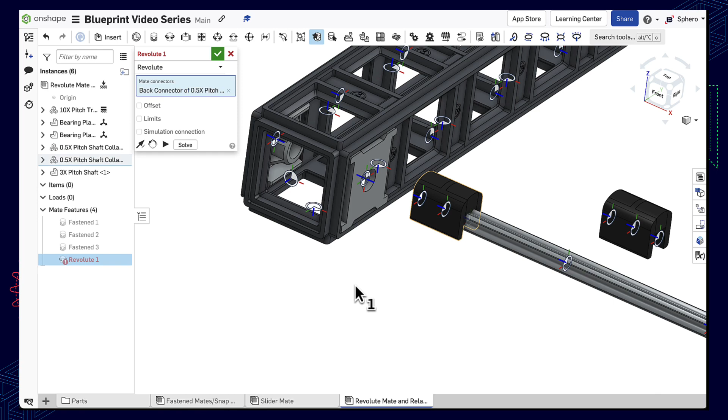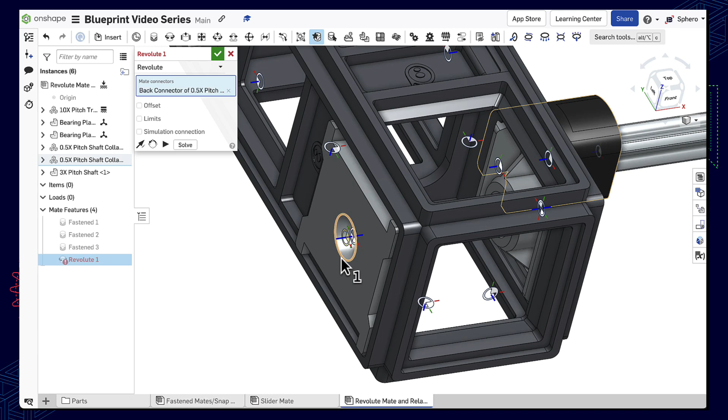Then select the mate connector, not the one that's inside of the bearing plate, but the one that's on the surface of the bearing plate. So you can move around until your cursor highlights the one that's on the outside edge of that hole through the bearing plate. When you apply this, notice that it moved the shaft collar, but not the shaft.

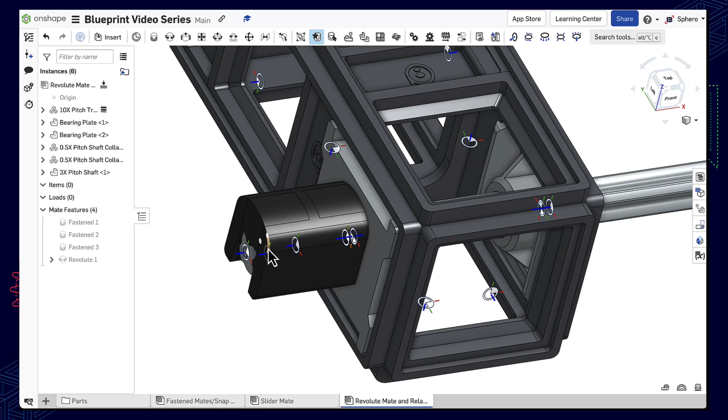Click the Solve button so that Onshape solves for all of the parts and mates that are inside of your assembly document. If you're happy with how the mate is constrained, click on the check mark. Now, we'll be able to rotate that shaft and shaft collar inside of the bearing plates. Notice that you cannot move the bearing plates or the shaft side to side from the bearing plates.

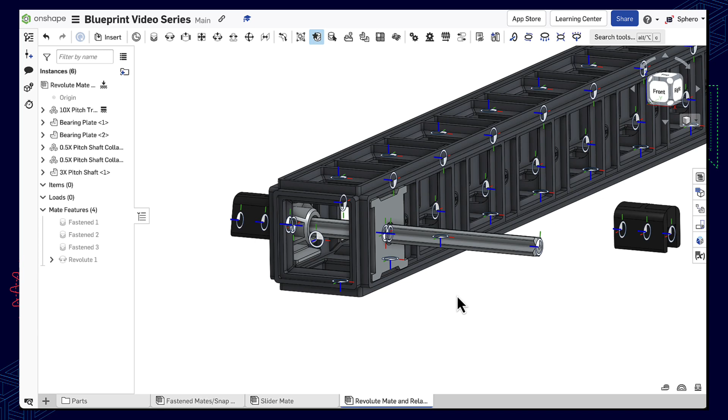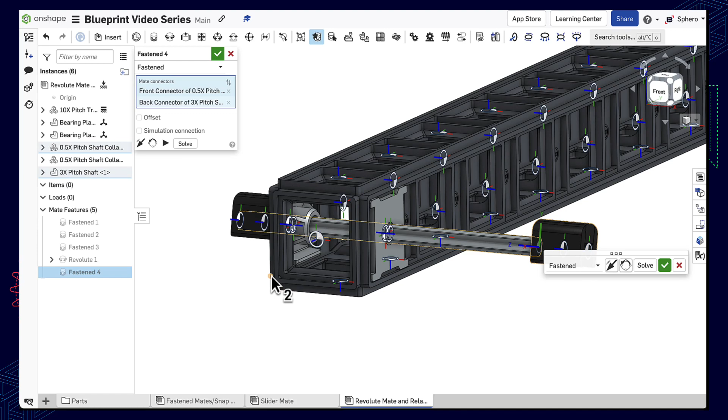Now, we need to constrain the other half-pitch shaft collar to the other side of the shaft. For this, we're going to use a fasten mate and select the mate connector on the shaft collar and the mate connector on the shaft. We don't want the shaft collar to be out here in space, so we're going to apply an offset by clicking on the offset checkbox and applying a z-axis offset.

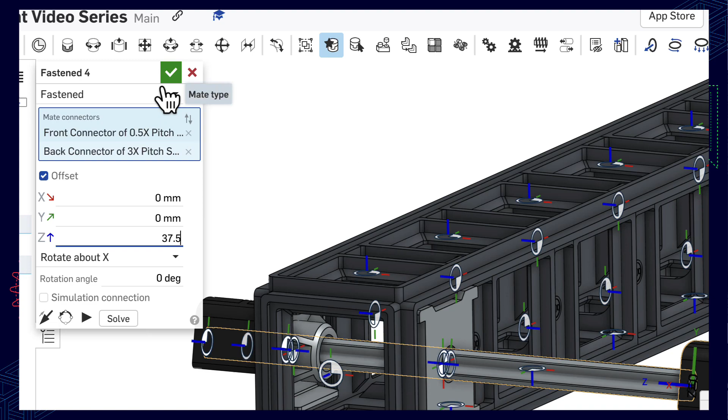In this case, we need to move our shaft collar 1.5 pitches. Remember that each pitch in the blueprint kit is 25 millimeters. So 37.5 millimeters is the offset, and now you can rotate this shaft and shaft collar assembly inside of the bearing plates.

Learn how to set up gears in Revolute Mate Part 2, Gear Relations.